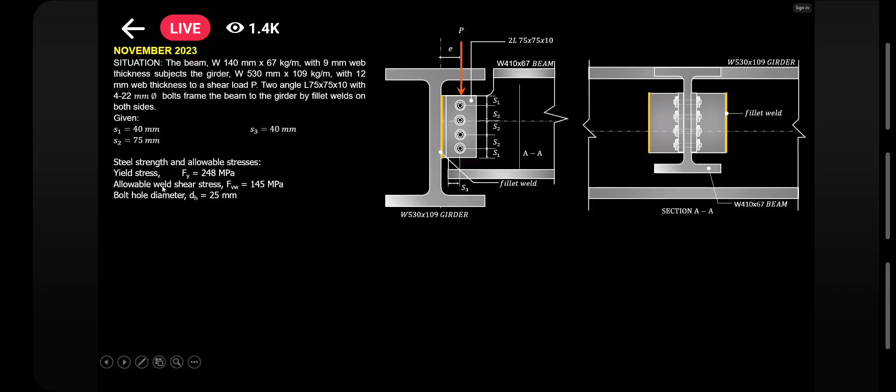So binigyan tayo ng allowable stresses ni Ma'am Proxy. So weld shear stress is equal to 145 megapascal. Okay, ganito. Ang question ni Ma'am Proxy during the time is number 1.

Given that P is equal to 280 kilonewton and E is equal to 0, determine the required weld thickness in mm. Alright, so dahil sinabi ni Ma'am Proxy na E is equal to 0, ibig sabihin nito, tanggalin ko muna ito. Ano ba ito?

Okay, dahil sinabi niya na E is equal to 0, it means na yung load natin is banda dito. Di ba? And notice that this force is already acting at the center ng ating weld group. So ano ba ibig sabihin nito? This only means that this is a concentrically loaded connection.

So basically, this force will be distributed equally sa buong length ng ating welds. So ano lang gagawin natin? When E is equal to 0, we will analyze this due to direct load only. This makes sense kasi wala namang may-induce na moment, di ba, when E is equal to 0.

So ano yung formula gagamitin? fv is equal to force over the total length. So kung saan yung P natin as given, this is 280,000 at yung length natin, paano ba yung length?

So nandito yung weld length guys ha. Pag i-project natin yung weld length, ito po yun. So that is your L. So to get the total length, yung isang length na ito, this is dalawang 2S, dalawang S1, tapos tatlong S2. So since kabilaan po ito, we need to multiply it by 2. Okay, so this is equal to 610 mm.

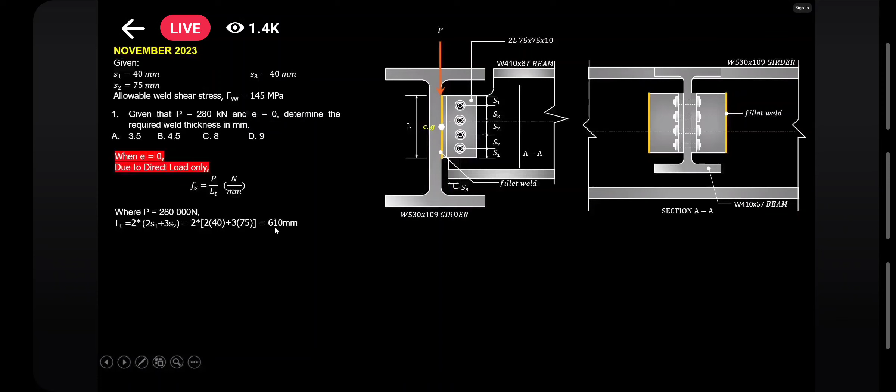So therefore, our force due to direct load, that is 459.02 Newton per mm. Ngayon, since nagdi-design tayo ng weld thickness, wag nating kalimutan yung pinaka-principle, di ba?

Actual stress should be less than or equal sa allowable stress. In layman's term, kumbaga, dapat mas malaki yung capacity natin kumpara sa stress na pwedeng idulot ng force na 280 kilonewton. So ano ba yung stress? Di ba baon natin yan, di ba? Force over area less than equal sa allowable stress.

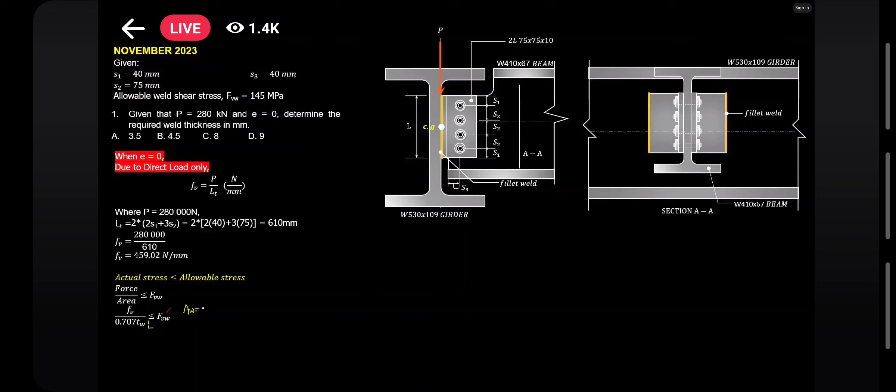So yung force natin, that is fv over 0.707 tw. Now dito ko i-emphasize lang guys ha, kasi yung iba, dito na mamali. Ang ginagawa, nilalagyan pa ng L dito. That is wrong, no? Sir, di ba yung area ng welds, this is 0.707 TW times L.

Well, technically speaking, you are correct. But this is not valid for this context, kasi itong fv na to, this is Newton per mm. So by unit analysis, this does not make sense.

So you have Newton per mm, i-divide mo sa TW, that is mm, di ba? Okay, yung length, that is also in mm. So what would be the resulting unit? This is equal na yun sa Newton per mm to the third. And this is not equal kanino? Kay megapascal, because megapascal is Newton per mm squared. Okay, I hope naintindihan niyo na.

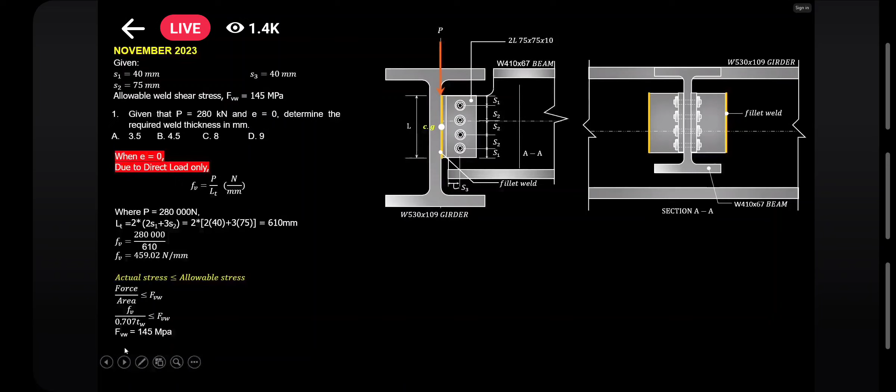So let's continue. Yung Fvw, substitute lang tayo dyan, and we get already this answer. Now, nung lumabas to sa board exam, unang tanong, nakangiti lang sila kasi yun, 4.48. Kuha na agad yung sagot natin, that is 4.5 mm, okay?

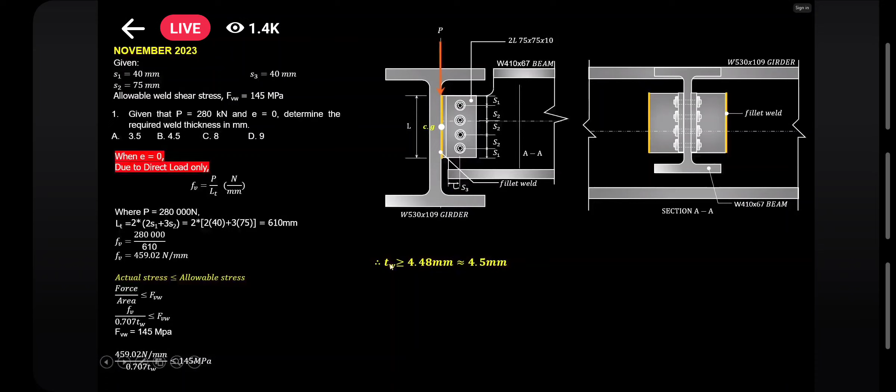Let's go to the second question. Yung pangalawa: given that P is 280 kilonewton and E is equal to 45 mm, determine the critical shear. Okay, because of the presence of the eccentricity, kailangan po nating i-account yung moment na pwedeng i-induce caused by this eccentricity, di ba? So therefore, itong critical shear na to, this is not only for the direct load only, no?

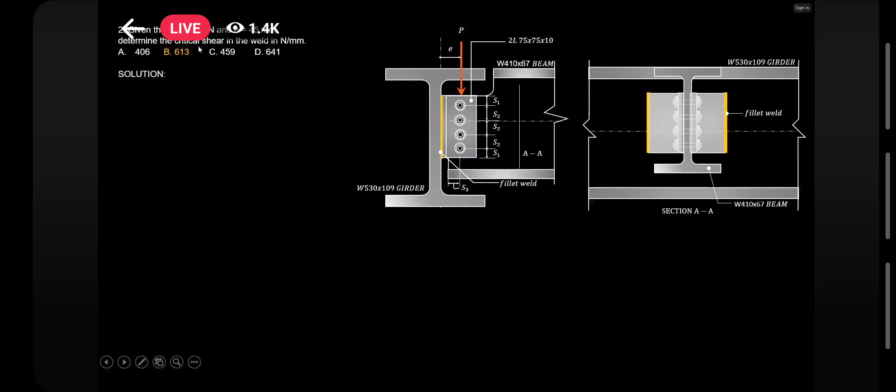This is plus the moment effect. So critical shear only means resultant. In getting the resultant, that is just fv squared plus ft squared.

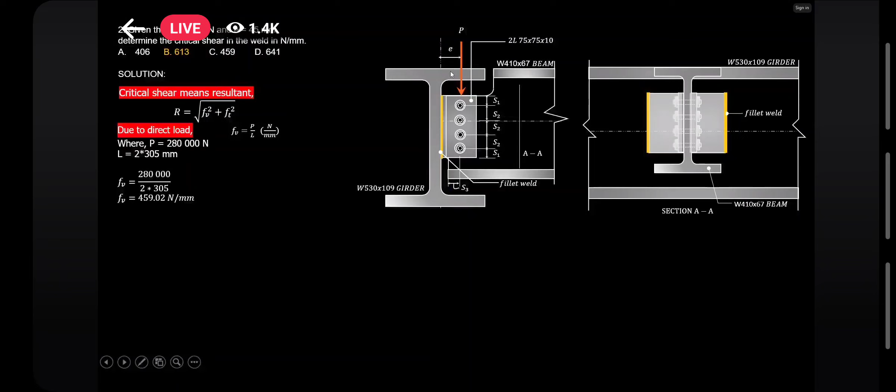So guys, let's just make a convention here. If you can generate moment about X or moment about Y, the effect is always bending. MZ, on the other hand, is twisting.

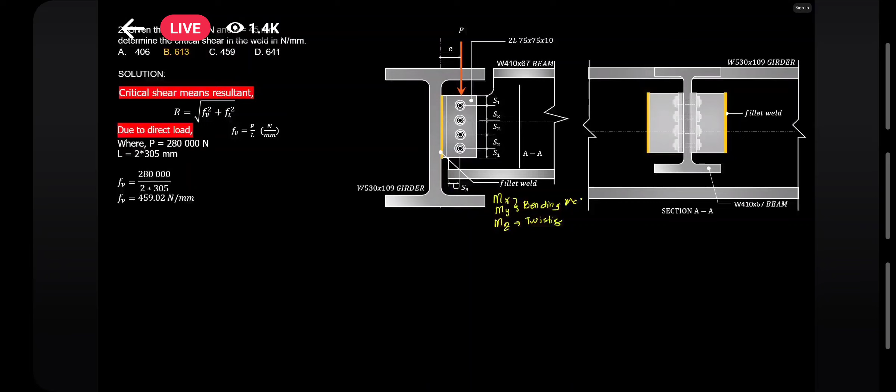For bending, this is MC over I. For twisting, this is TR over J.

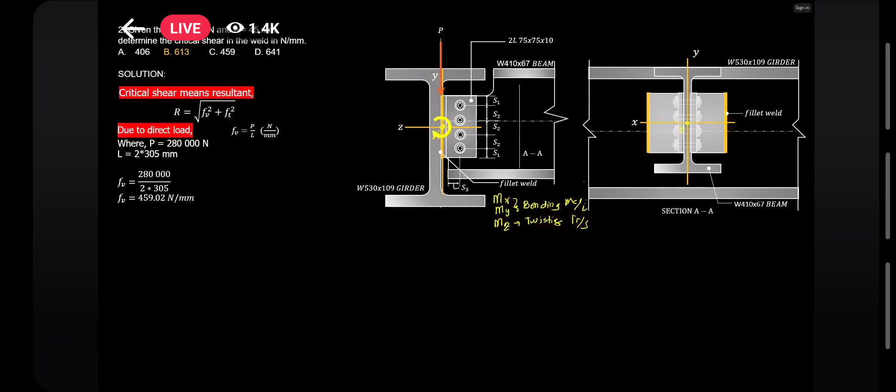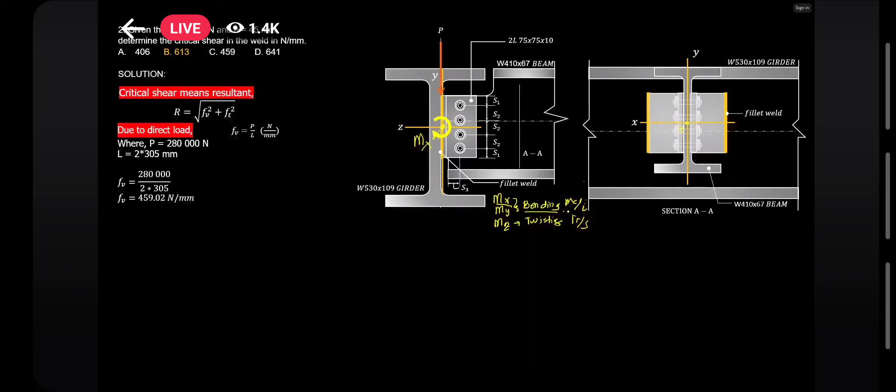This is moment about X, right? If it's moment about X, therefore the effect is bending, and therefore the formula is MC over I. Okay, I hope that's clear.

Let me clear this up. Therefore, due to bending, FT equals MC over I. What is our moment? That is just P times E, right? 280,000 times 45, and that is 12.6 times 10 raised to the power of 6 Newton-mm.

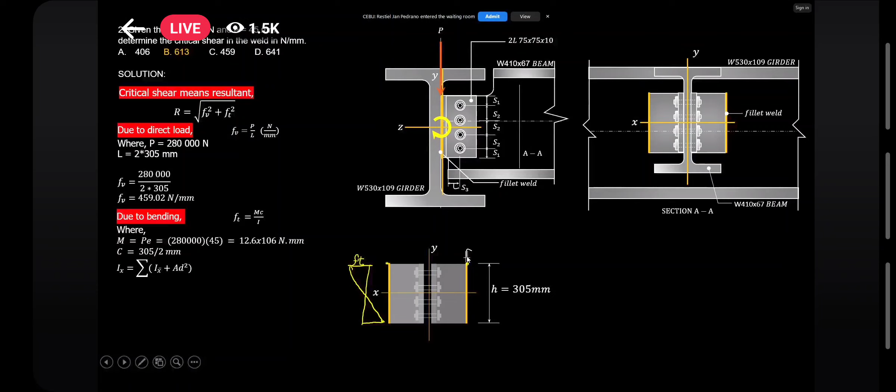That is, summation of the centroidal moment of inertia about X plus A d squared. Because this is a line, right? If it's a line, it means our width is very thin, but we can consider it as 1 or unity.

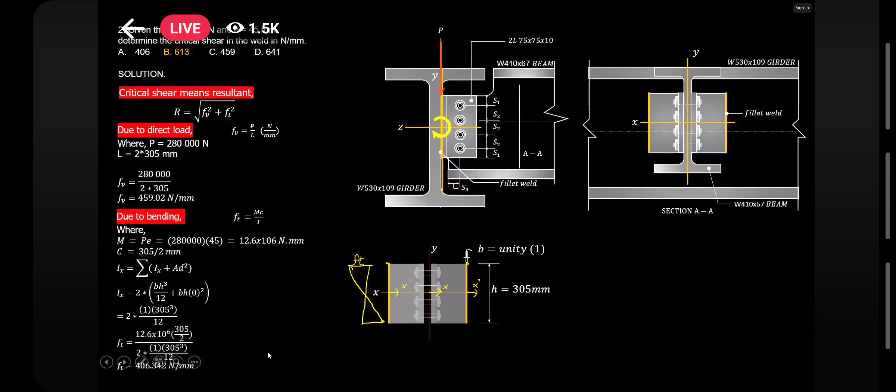So let's just substitute. We get the FT. So the FT is equal to 406.342 Newton per mm.

So in order to get the resultant, we compute that. That is 613.04 Newton per mm. Okay, so that's how simple it is.

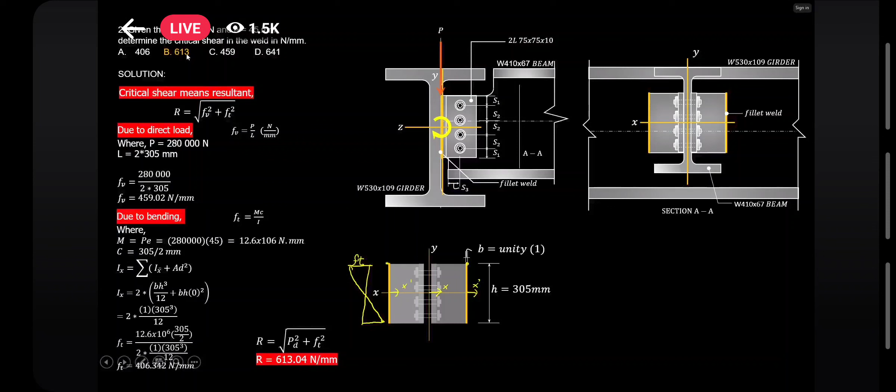What if, sir, it's lying down? Okay, how do we get the moment of inertia? Just establish an axis. Then, this is the depth. This is our B. So what happens, this width, okay, this becomes the height, so to speak. So you treat that as unity too.

1. So it's still the same, the moment of inertia is equal to the summation of the centroidal moment of inertia plus AD squared. Okay, so basically that is 2 since it's on both sides. B times our height, that becomes 1, over 12, plus BH times D over 2 raised to 2.

That C there, guys, that D there, this is it, because here is our local X. And here is our global X. So meaning, this axis doesn't coincide with this axis. So we need to transfer, right? So this dimension is D over 2. That's why it's like this, okay.

So notice that B times 1 raised to 3 over 12 is very small, guys, because what you're cubing is 1, right? So we take this as negligible. So if it's negligible, guys, it won't affect our moment of inertia. So if that's negligible, that's just 0 for us. Okay, so hence, Ix is equal to 2 times BH times D over 2 raised to 2. So this is our Ix. I hope you followed that, guys.

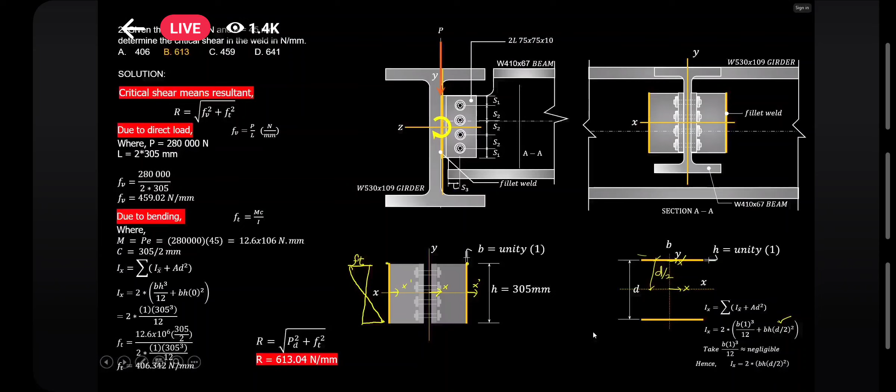If the bolt capacity in double shear is VU 173.2 kilonewton and E is equal to 45 mm, everything is confusing because it only says bolt capacity. Can we take this individually or is it by group? When this came out in the board exam, guys, this is taken as the group capacity, the bolt group capacity, because 173.2 is too large if it were per bolt. So this is taken as group.

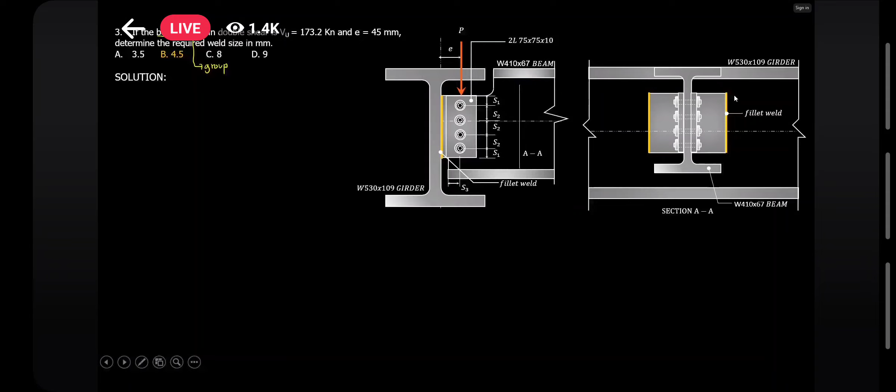By the way, in your pre-boards, I guess what's written there is each bolt capacity, right? So that's clearer than the board exam. So for each bolt capacity, you need to multiply it by 4. So that's it. Okay, but this is what came out in the board exam based on my source.

So due to direct load, fv is equal to P over L. Where, okay, our length stays the same, it doesn't change. Just our fv, that becomes 283.93, because that went down, becoming 173,200 Newton.

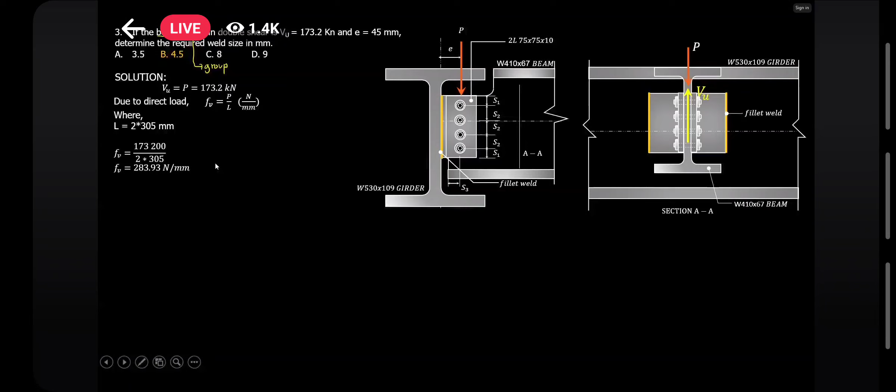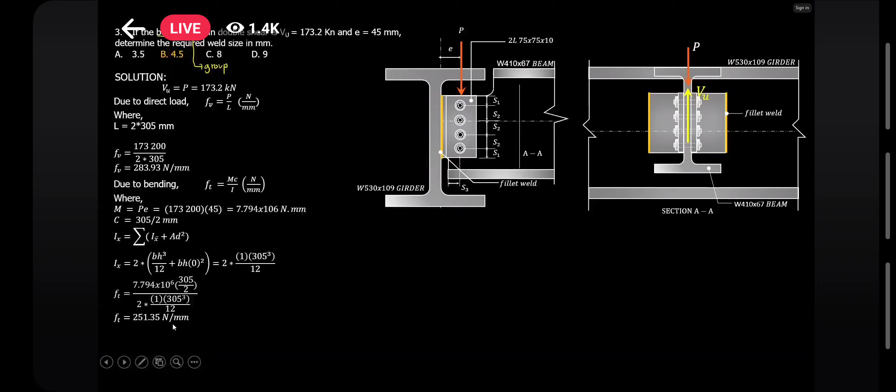So due to bending, bending is still the effect. So it's still the same, guys, right? Just repeat for performance, it's still the same. So you get the FT equals 251.35. So there you go, we got the resultant.

Since weld thickness is what's being asked, we just need this principle: actual stress should be less than or equal to the actual allowable stress. What's actual stress? Force over area. Our force, don't forget this is in terms of Newton per mm. We divide by 0.707 TW, less than or equal to Fvw. So don't put L here anymore, guys, because we're already per mm.

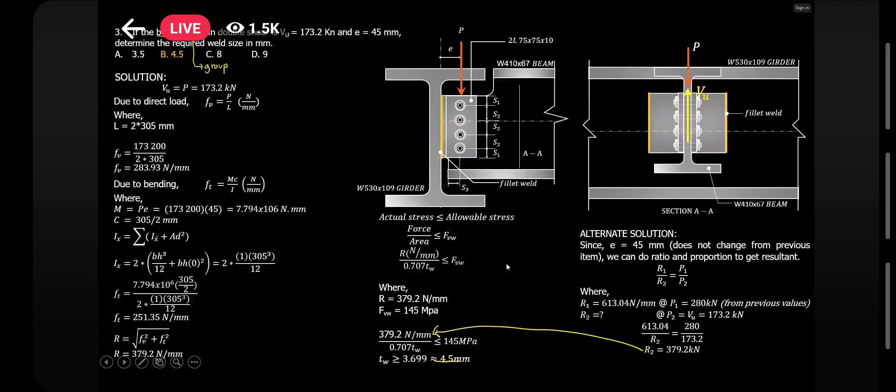Pero guys, this is only valid if they have the same eccentricity. Kasi pag hindi na, kailangan mo gawin yun. Okay, so I hope simple lang. This is our first item, our first situation. Can we move on to the next? Wala tayong magagawa, set tayo.

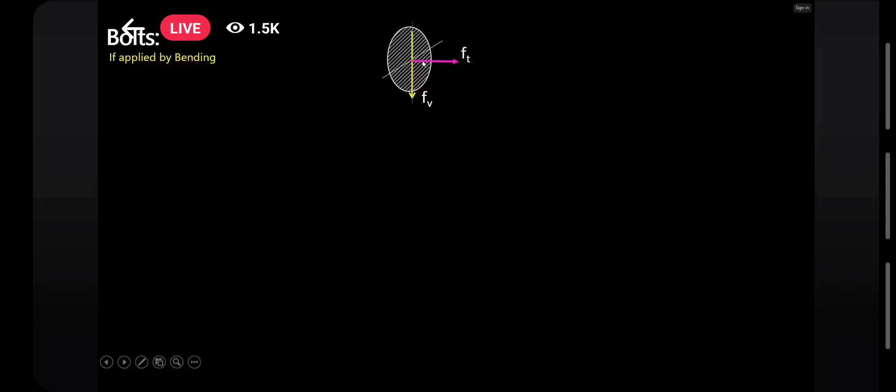Next, sige. Ginawan ko to ng summary. Para sa bolts, if applied by bending, yan no? Bending naman na, so pag ganyan, ito yung bending, ito yung ating shear. So, tensile stress, force due to bending only. Yung shear stress due to direct load only.

Note, hindi pwede nating i-combine at saka kunin natin yung resultant to solve for the stress because every force will have different effects with respect to its area. So we need to check the individual limit state.

Remember, itong ating tensile to, kasi bakit? Yung area na to perpendicular sa force na to, di ba? Dito namang fv, this is shearing. So hindi po natin kailangan na kunin yung resultant.

Mag-iiba po yun. Ano yung kunin mo dyan? Huwag mo sabihin, kunin mo yung resultant dito. Paano ba yan? Hindi na yan normal at the same time, hindi na yan parallel. Anong tawag doon? Ewan ko.

Itong FT, klaro naman na perpendicular yan. Itong ating plane with respect sa ating fv, that is parallel. So you need to check this individually. Huwag mong i-resultant.

Pero ganito guys, if ever pinapa-consider talaga kasi sa totoong design, if you have both forces na nag-act dito sa bolt, use code given for the reduced capacity of tension due to the presence of shear. Mababawasan kasi yung tension capacity if meron kang shear force. Okay, so nababawasan yan, gagamitin mo yung code na to.

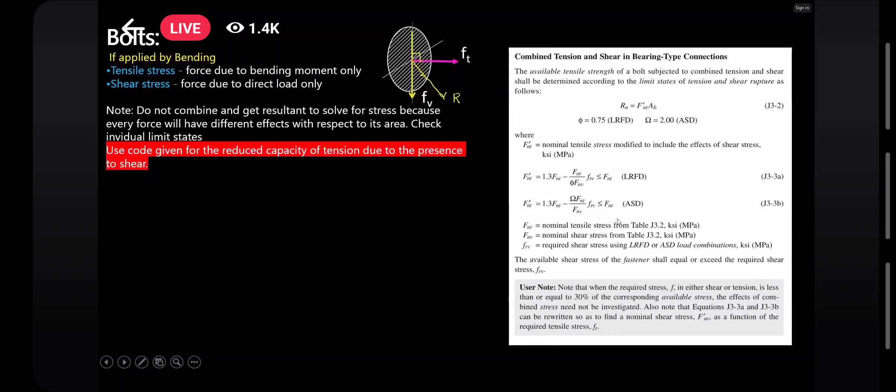Nakita mo ba to? Gaano to kahaba? Oh, di ba? Oh, hindi yan lalabas. Kalma lang, di ba? Huwag mo nang, ano yan. Anong gusto nating patunayan, di ba?

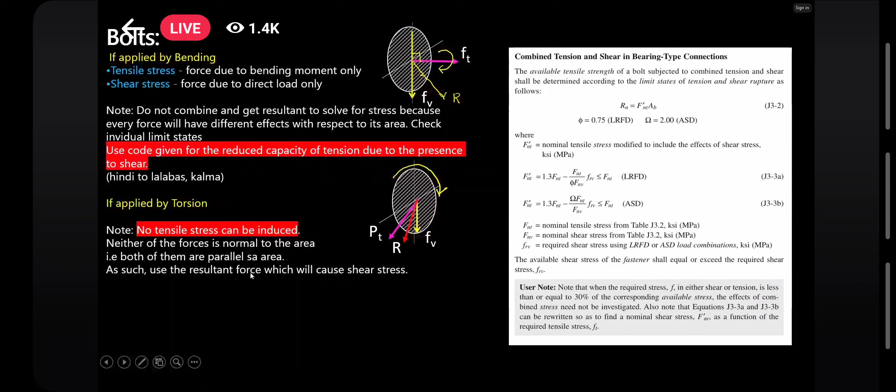Kung shearing effect ng torsion at due to direct shear or direct load, there is no tensile stress can be induced. Neither of the forces is normal to the area, right? So walang tensile, makes sense. Both of them are parallel sa area. So as such, you can use the resultant force which will cause the shearing stress.

Yung shear stress, kunin mo lang, no? Yung resultant due to the combined direct load and torsion. I hope malinaw po yun, kasi namamali yung iba dito.

Okay, for welds naman, it doesn't matter. Kaya lang, ang tandaan nyo, wala pong tension stress na maidudulot yung force doon sa weld. Shear stress lang. Ang gawin mo, kunin mo lang yung resultant always. Again, pag welds, kunin mo lang yung resultant always.

Hindi mo ba napapansin guys? Ang palaging binibigay sa welds is the allowable shearing stress sa weld. Ito yung binibigay palagi sa weld eh. Meaning to say, ang palaging mai-induce ng mga forces is shear stress only. I hope klaro tayo yun na, so that's always shearing lang.

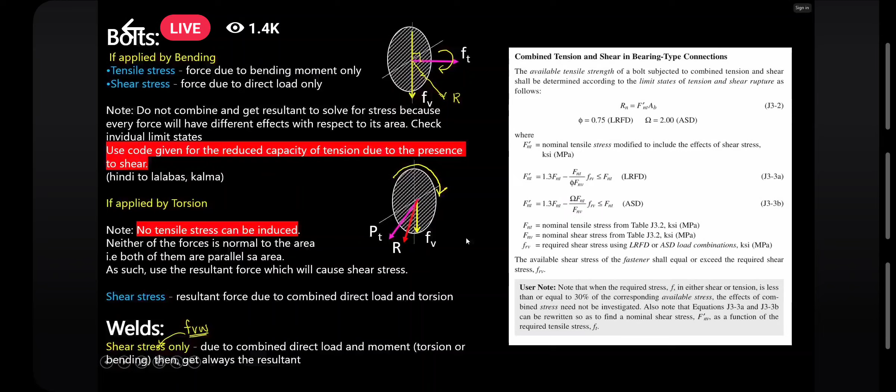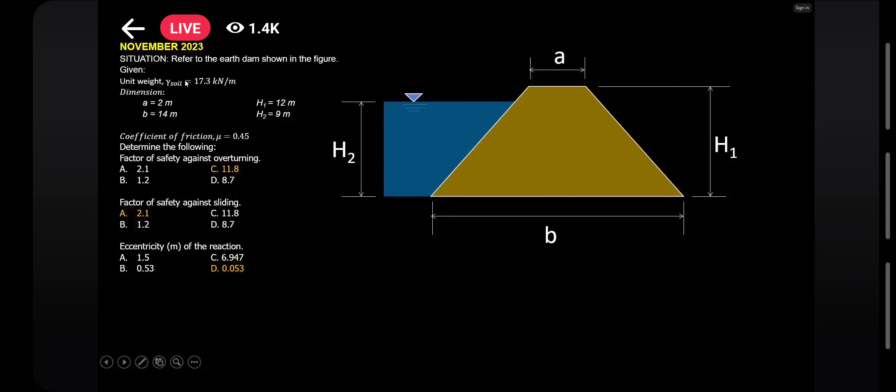Okay, so this is also the latest board exam, November 2023. Refer to the earth dam shown in the figure. You have unit weight of soil, 17.3 kilonewton per meter cubed. When this came out in the board exam, there was one set where the writing was so small it seemed like it wasn't considered. The unit weight used here was 23.4.

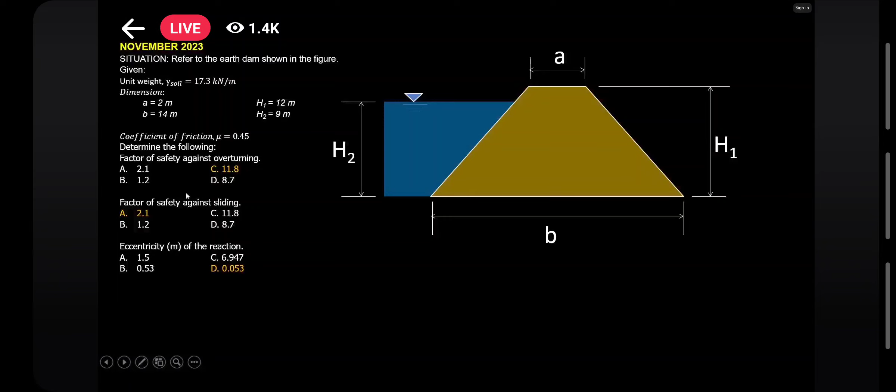Okay, so the dimensions are given too: 2 meters, 14 meters, 12 for H1, and 9. The coefficient of friction is also given. Determine the following: factor of safety against overturning. Let's tackle this first. I've established the dimensions here so we won't get confused. So, solution: solve for the weights and hydrostatic forces first.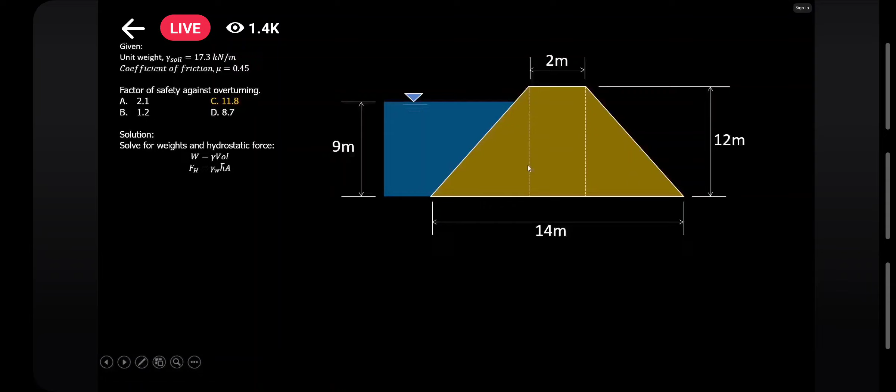The weight is just gamma of the material times volume. The horizontal force is gamma of water times h-bar times area. So we can divide this into 3 sections. This is our weight 1, this could be our weight 2, and this is weight 3.

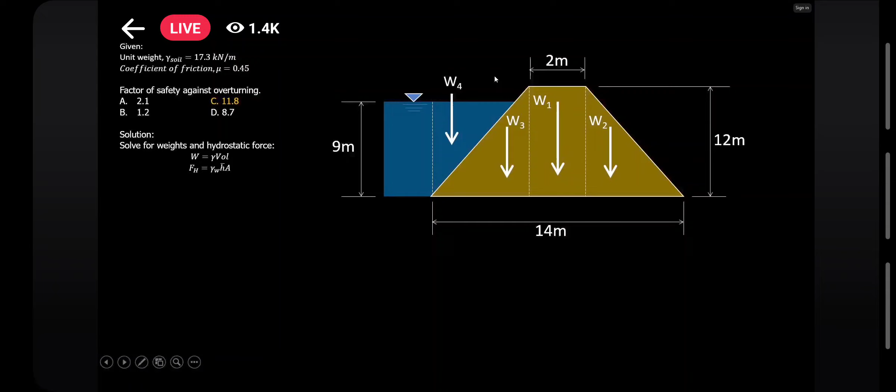Using 1 meter strip analysis, weight 1 is gamma soil times volume 1. So 17.3 times this 2 base times this height, 2 times 12, and we get this value. You can store that as A.

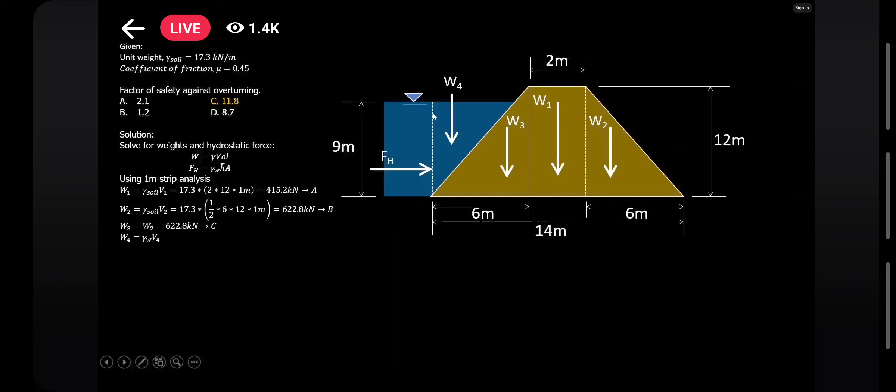So what's the volume of that? It's 1/2 times Z times 9 times 1 meter strip. Okay, by ratio and proportion, since they have the same slope — don't use ratio and proportion if the slopes aren't the same, I've told you that — Z over 9 equals base over height, so Z over 9 equals 6 over 12. We get Z equals 4.5 meters.

Okay, so now we have weight 4. You can store that to D. And now we also get FH. So FH is equal to this.

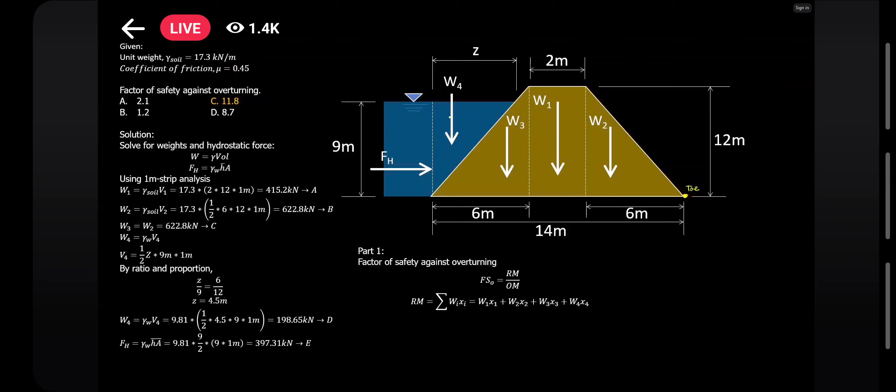So let's answer: factor of safety against overturning. Fs equals Rm over OM. What is Rm? The resisting moment. Where do we take the moment? Right here, at the toe. So that's the toe, and then we compute the moment there, but we need the x distances.

Here, this is x1, the x distance from weight 1 with respect to our toe. So that's half of 2 plus 6.

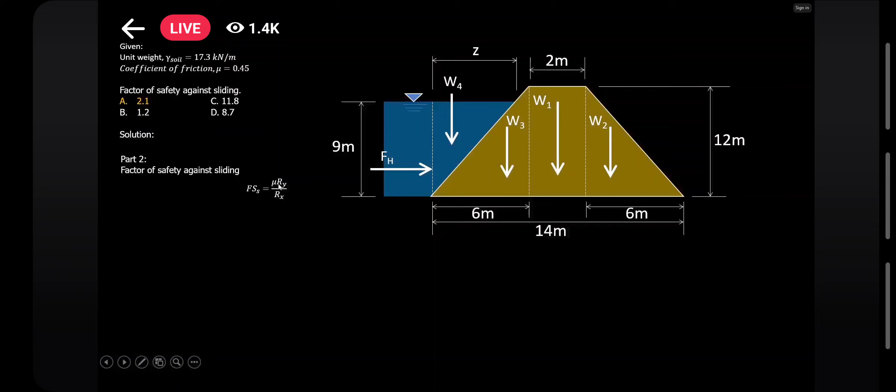To get the Ry, summation forces vertical ka lang. W1 plus W2 plus W3 plus W4, and you get this.

1859.45 kilonewton, so yung Rx naman, summation lang tayo dyan, so that is 397.305. So kuha na natin to, and this is 2.11.

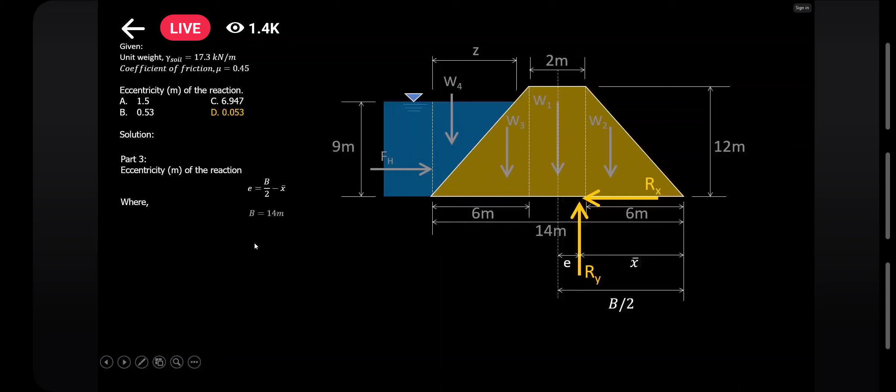Yung B natin is 14, and yung X bar natin is RM minus OM over RY. From previous solution, nakuha na natin yun, di ba? So diretso natin, this is X bar, that is 6.947. So kuha na natin yung E, that is...

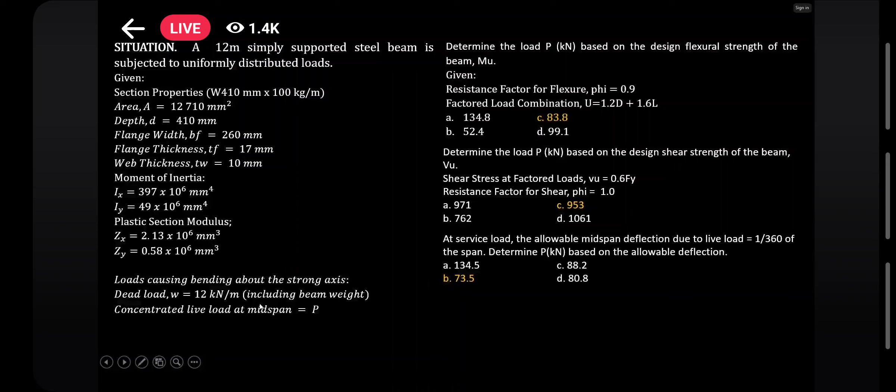Let's read this: a 12-meter simply supported steel beam is subjected to uniformly distributed loads. Given the properties, loads causing bending about the strong axis, dead load is this including the beam weight, and concentrated live load at midspan. So, number 1.

Determine the load P based on the design flexural strength of the beam, Mu. Given yung phi, that is 0.9. Factored load combination, binigay din.

Okay, so itong problem na to, this is under plastic analysis. Plastic analysis talaga to. So we need to solve this using collapse mechanism.

So paano ba yung idea nun? Recall kayo, alam naman natin na daan natin ito. So recall ko lang kayo. Halimbawa ito yung beam, sinubject natin yan ng load. So meron tayong 1.2 dito because kailangan guys naka-ultimate.

Because it's the ultimate load that can cause collapse at hindi po yung service load. So kailangan po maglagay ka ng factor.

Okay, pag ganito po yung loading natin, tapos simply supported, ang plastic hinge na mabubuo is obviously nasa gitna yan. Pero kung meron kang concentrated load, which happens to be nasa gitna din, edi nasa gitna talaga yung plastic hinge na mabubuo natin.

Okay, so what would be the collapse mechanism? So ito po yung mangyayari dyan. So itong nandito banda, ito yung point na yon kung saan nangyari yung plastic hinge. Therefore, madidevelop dyan yung plastic moment.

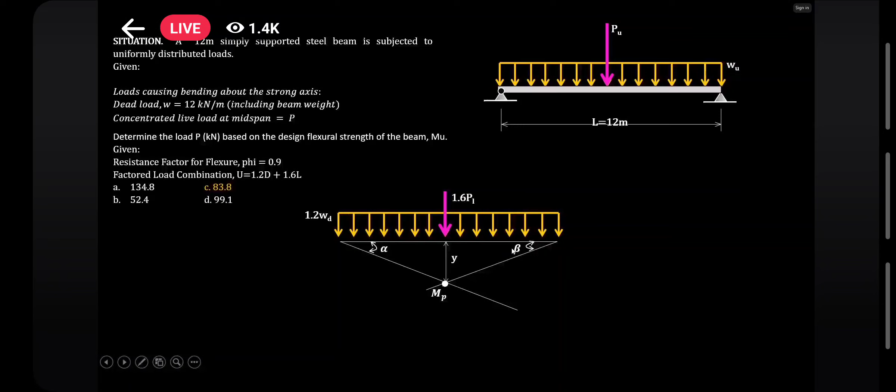So itong Y na to, this is your linear displacement. Ito nandito, this is your angular displacement. This one is beta. Now, do you agree guys na if this is alpha, therefore yung angle na nandito is alpha plus beta. Okay, so this is the total length.

Paano ba pag-solve ng collapse mechanism? Tandaan nyo to, guys, ha. If we are solving collapse mechanism, we just use the principle of virtual work method, kung saan ini-equate lang po natin yung work done by the external load sa work done by the internal loads.

But remember, we have two types of load here: uniform at saka concentrated load.

If you have uniform load, para siyang ano yung idea sa influence line diagram. Minomultiply mo siya sa displaced shape ng ating beam, di ba? So ganun lang po dito. Since we have uniform load, imomultiply mo siya sa area na nabuo. O anong area to? So triangle yan, di ba? So multiply mo yan dito sa uniform load.

Yung concentrated load naman, imomultiply mo siya sa kanyang respective ordinate, kung saan siya nakalocate. Since this is located at the midspan, ito po yung Y na kailangan nating i-multiply. Okay, ganun lang po sa work done by the external load.

Pero pagdating sa work done by the internal load, so ano ba yung load internally? Di ba yung moment? So saan natin siya i-multiply so that we can produce work? I-multiply mo siya sa angular displacement. And in this case, yung kanyang angular displacement here is alpha plus beta.

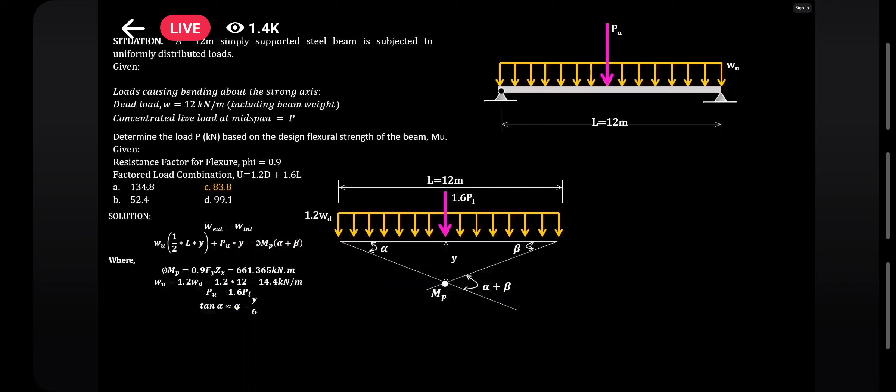O ito, gusto ko lang emphasize to itong tangent alpha. Kailangan natin express yung mga angular displacements in terms of the linear displacement y. So, using trigonometry, that is tangent alpha equals opposite over adjacent, so y over 6, kasi kalahati ng 12 is 6. Kaya lang, itong mga angular displacement na to, itong mga angles na to, these are very, very small values, maliliit.

Nagsosolve ba kayo? Na-notice nyo guys na sobrang liit yung during your theory of structures? Since sobrang liit nito, okay, we can equate this as the alpha itself, and that is equal to y over 6. Ganun din po sa ating beta, y over 6 yan.

So, by substitution, kukuha mo na po yung ating PL, that is 83.8. And that's exactly sa C. So, yun.

Magbigay lang ako ng example kung saan ang plastic hinge na pwede ma-develop is 1. O paano ba yun? I think ito yung mas ginagawa ng iba kaysa yung plastic analysis, yung collapse mechanism. So, MU less than equals sa ultimate capacity.

So, sino man yung MD? MD is the moment caused by the dead load. So, ano ba yung maximum moment na pwedeng i-induce ng uniform dead load na to? WL squared over 8. Tama? Pag live load naman, concentrated lang naman to, ano ba yung moment? Hindi PL over 4?

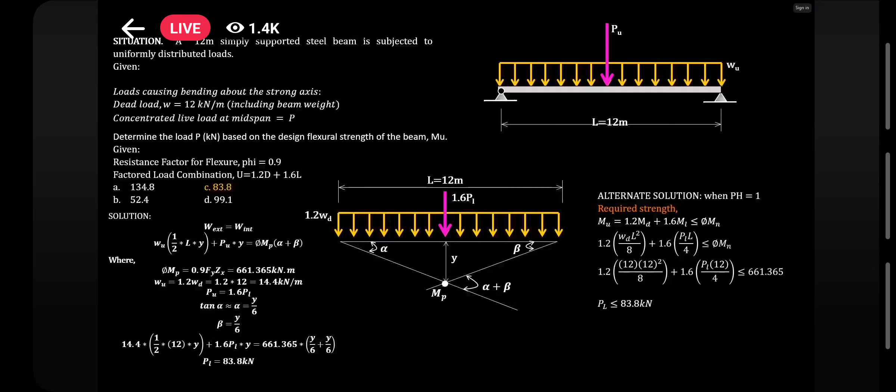Yung last November 2018, I guess November yun eh. Ewan ko lang guys, I'm not sure, basta 2018 ata yun. Yung lumabas sa kanila is hindi simple supported beam, prop beam siya. Pag prop beam, indeterminate yan, di ba? Eh di hindi na po iisa yung plastic hinge na mabubuo.

So, ito yung prop beam. Saan ba yung plastic hinge na mabubuo dito? Obviously, nandito ha, okay, ito. Change ko lang to. Ito, plastic hinge to nandito. Okay, ito naman, we have plastic hinge na nandito. Ito naman, ito yung tunay mong kaibigan, di ba? Oo, ito yung dalawang kaibigan. So, ito naman, plastic hinge na nandito. Okay, so obviously, dyan mangyayari yung plastic moment.

So, yung tanong, saan yung location nito? Yung location nito guys, alam ko na i-discuss natin to. So this is 0.414L. Sir, kailangan pa ba i-memorize yan? Yes, i-memorize mo yan guys ha, that's 0.414L. Okay, pag ganito lang guys, pag uniform loading.

ito yung basa prop beam.

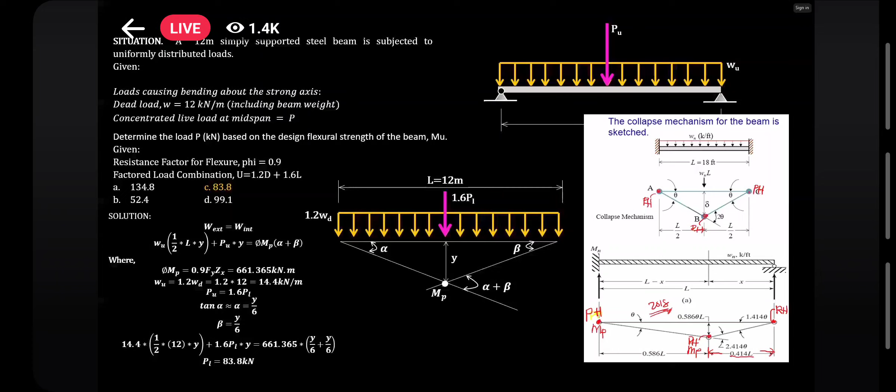Determine the P based on the design shear strength of the beam VU. Shear stress at factor loads, VU equals phi times 0.6 Fy, and the resistance factor is 1.0. So, required strength: VU must be less than or equal to our ultimate capacity.

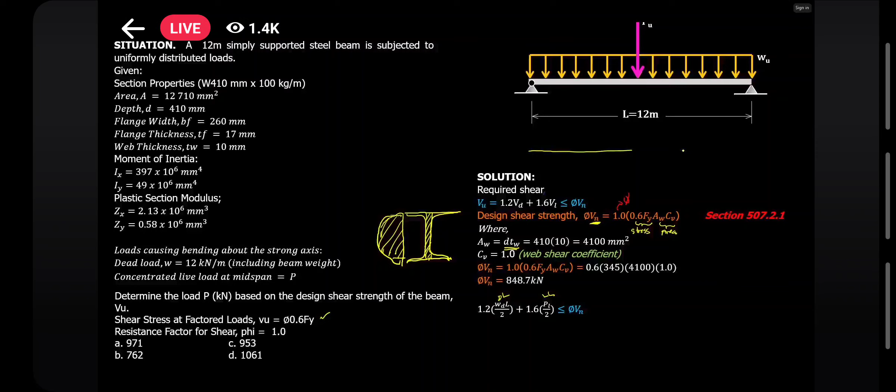This is the maximum shear that can be induced by the uniform load. If we draw the shear diagram, it looks like this, then like this. So this shear here is your WU times L over 2, plus PU over 2, where WU is 1.2 times the dead uniform load, and this is 1.6 times the live load.

I hope you were able to follow, guys. So, to be sure about the maximum shear, just draw the shear diagram. So by substitution, we get 952.875.

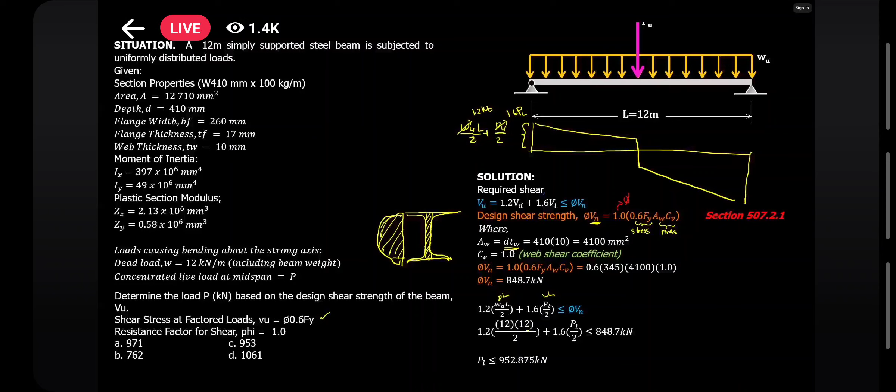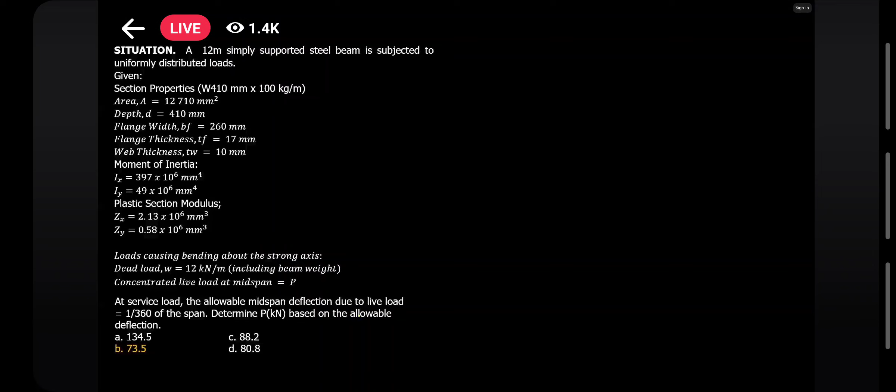So for the last question, we have service load. The allowable mid-span deflection due to the live load is 1 over 360 of the span. Determine the P based on the allowable deflection. So this is our configuration. What is our allowable deflection? That is 12,000 mm over 360, which equals 33.33 mm.

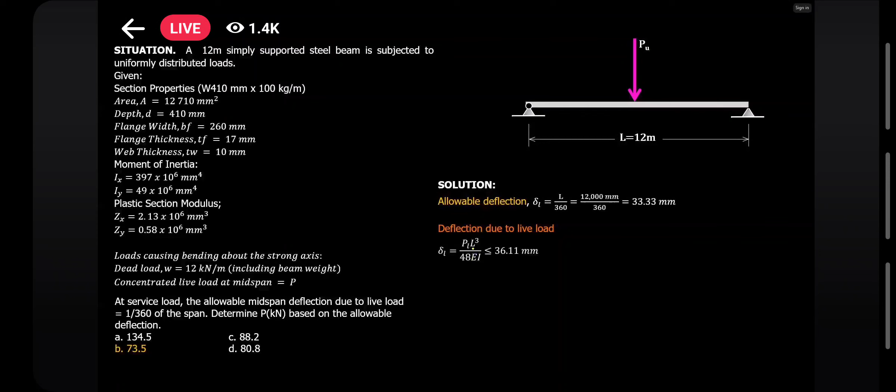So our deflection due to the live load, this is equal to PL cubed over 48EI. Guys, let's not forget this. What about if it's uniform load? That's 5 over 384, this is the constant, WL to the fourth over EI. That's for uniform load, guys, but for concentrated load at midspan, it's PL cubed over 48EI.

Okay, so let's just substitute. Guys, live load only, please. And remember, it says service load, so for service load, don't use the ultimate factored values. So therefore, this equals 73,500 Newtons. So that's it, this is the final answer.

So just remember, guys, what if it didn't say due to the live load? Then you might mistakenly include PD plus PL. That would be wrong, guys, because we're talking about serviceability, so only the live load should be considered. I hope that's clear.

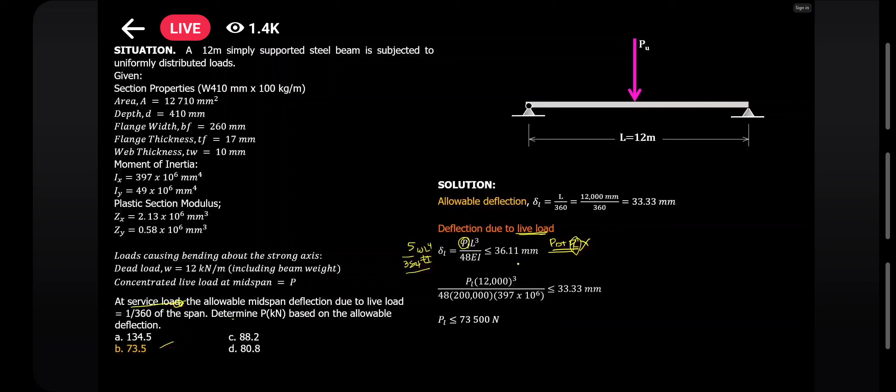Let's proceed to the last— oh wait, this isn't the last one yet. So this is really the last one now. Sheet pile: the sheet pile shown is provided with tension rods spaced 3 meters apart. The wooden stringer has D equals 350 mm and can be considered simply supported at each connection to the tension rod. Allowable bending and shearing stresses of the stringer are 16.2 megapascal and 1.84 megapascal respectively. So here is our figure.

So this is our D, and this is our B. Like this. Okay, what is the question here? What is the design moment of the stringer in kilonewton meters? Don't worry about this other moment.

Let us establish the forces. Since this is a tension rod, of course there's tension, right? Then this F1 is caused by the lateral force of the earth or soil, while F2 is your hydrostatic force. So F1 equals one half Ka gamma of soil times H squared, right? So that equals what?

89.91 kilonewton per meter. For F2 naman, that is 1/2 gamma ng water times H squared. So yung F2 natin, that is 35.76 kilonewton per meter.

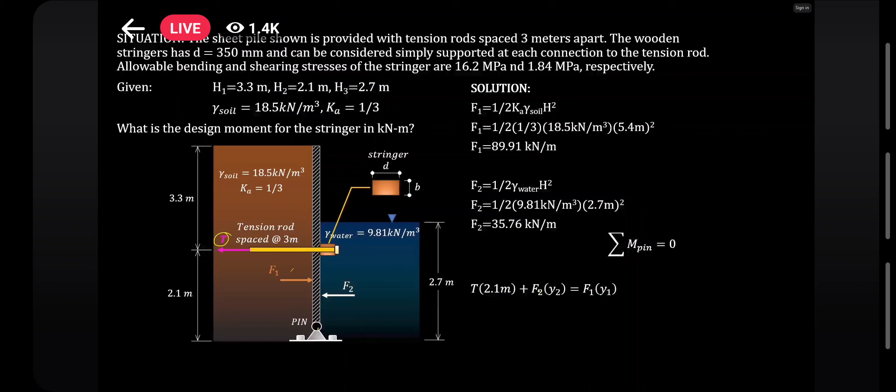So by taking summation moment at the pin, ano bang makukuha natin dito? It's the tension, di ba? So T times 2.1 plus F2. So asan ba yung F2Y, ang Y2 tsaka Y1? So ito yung FY1 natin. That is the distance from the force 1 with respect sa pin. Ito naman yung ating F2 with respect sa ating pin, that is Y2 naman. So substitute mo lang siya.

Okay, so therefore we have this T equals 61.741 kilonewton per meter. Now this is per meter pa lamang, guys. So since we are spaced 3 meters apart, so you multiply mo to ng 3 meters and you get 185.22 kilonewton. Now ano nang gagawin natin?

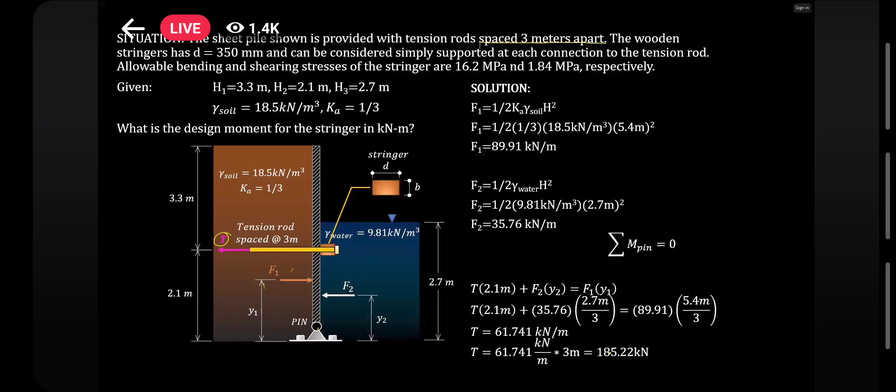Okay, so ito yung dapat nating maunang makuha, guys. O bakit sir, o ganito.

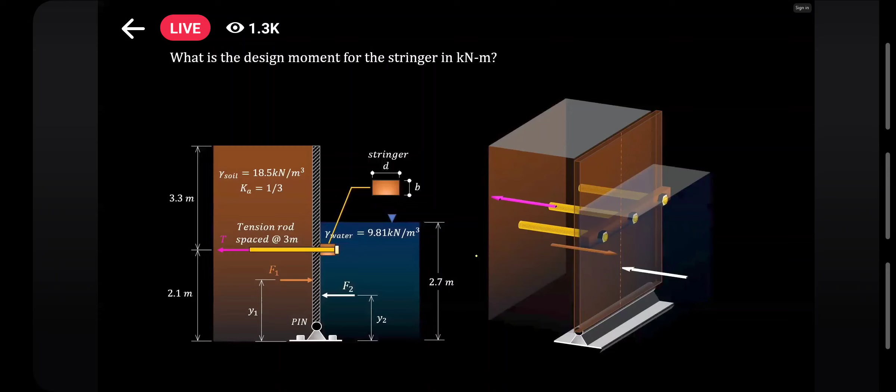So ito kasi yung, para mas ma-imagine nyo, ito yung forma ng ating stringer. So bale ito yung ating wooden stringer. Ito nakikita nyo, ito yung wooden stringer. Ito naman yung mga tension rod na nandito. So itong brown, that is the lateral force. Saka yung white, saka yung pink, that is your tension rod. Okay, I hope na-imagine nyo.

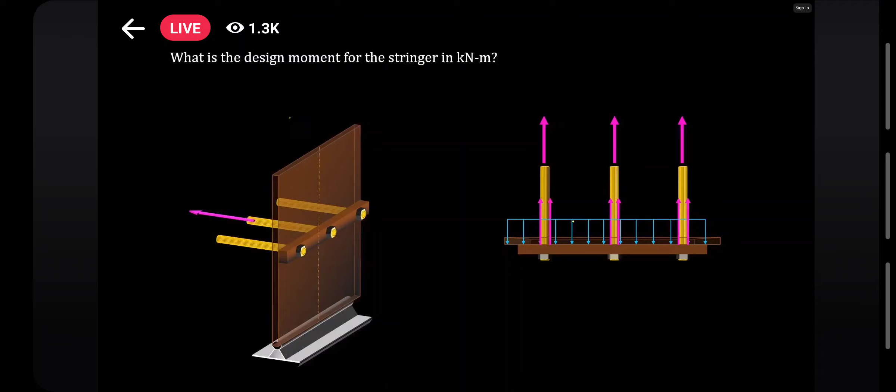So yun, so what is the design moment? Okay, ito gawin. Di ba kung titingin tayo sa top view, ito yung makikita natin. I hope na-imagine nyo guys. Pag titingin ka sa top view, ito yung makikita natin. So yun, okay, nakita nyo ba? Pinaghirapan ko yun.

Di ba, yan po yung ating magiging free body diagram. So ito yung T, ito yung R, ito yung W natin. So ito yung 3 meters na sinasabi niyang 3 meters apart. Okay, so what would be the analysis here?

So from the beam diagram shown, since ang moment na pwede nating ma-induce dito, since this is uniform na, that is WS squared over 8. So di ba guys, may given tayo na T? I mean na-solve na natin yung T, di ba? 185.223. But okay, pwede ba nating isipin, guys, na itong T na to, is the resultant of these R's.

Di ba, so yung T natin is 2R, di ba? Ito yun, kabilaan, resultant. So kung kunin natin yung R sa kabilaan, edi 92.612 kilonewton tayo.

Okay, solving for W, okay, parang nauna yung moment na. Anyway guys, malalaman natin kung bakit ito yun, WS squared over 8. Kasi, okay, parang ititreat kasi natin itong span na to as simple span. O tingnan natin ha, para siyang ito. I-redraw ko siya maayos.

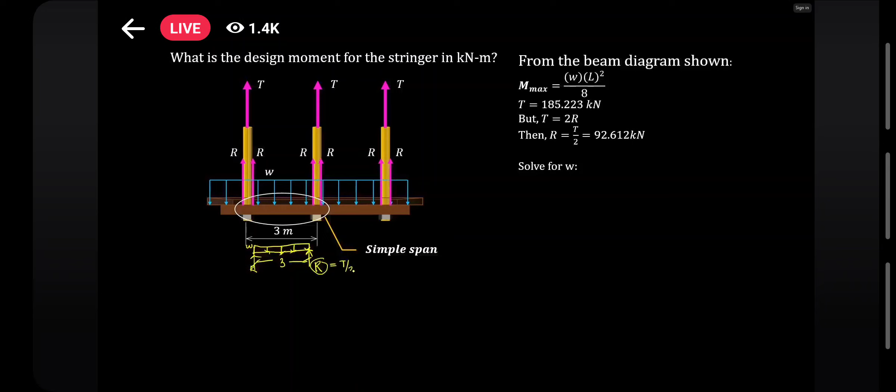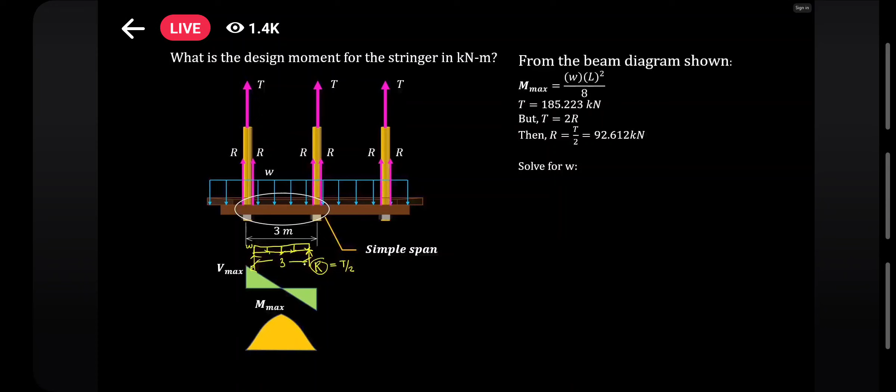So itong R, saan natin nakuha? This is T over 2. Okay, so yung shear diagram nito is basically ganito, di ba? Tapos yung moment diagram is paganyan. Okay, kasi simple span lang naman to eh. So yun, oh ito pala.

At least na-imagine nyo, so kung bakit WS squared over 8 yan. Well, we treat this as simple span eh. So W, okay, that is, hahanapin natin. So di ba yung R na-solve na natin kanina? Na-solve natin to guys, gamit yung T. Di ba, T over 2 lang to, which happens to be 92.612.

Equals W times L over 2. So the W is 61.74. Kumbaga guys, di ba, parang sanay tayo na mag-solve ng reaction, di ba? Ito naman, given yung reaction, isi-solve natin yung W. Do you get my point? So parang pabaliktad siya, okay?

So yung W natin na nakuha is 61.74 kilonewton per meter. And the maximum moment, therefore, is WS squared over 8. So substitute natin yan, the answer is 69.458 kilonewton meter. Okay, so ganun lang.

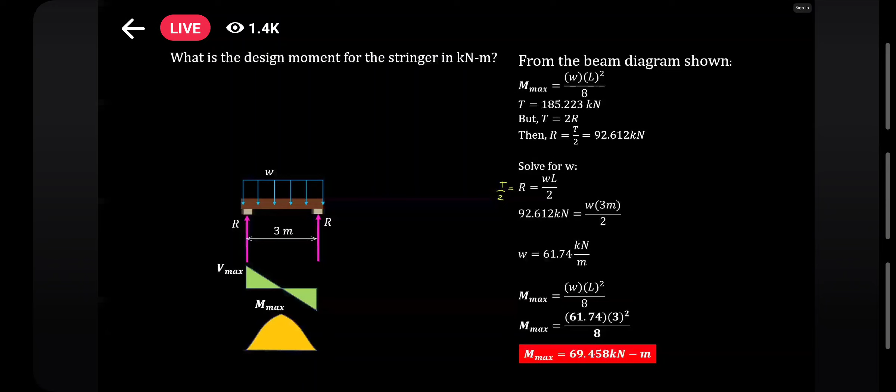Okay, what if, ito naman yung tanong, what is the value of the stringer width based on bending? Okay, so since nagdi-design tayo, wag nating kalimutan to, di ba? Actual stress should be less than allowable stress. Dapat mas malaki yung capacity natin kaysa sa stress na pwedeng idulot ng load natin. So yung allowable na binigay is 16.2 megapascal. So therefore, ito na po yun na. So ang actual stress, that is bending, so MC over I. So moment, di ba, parang nasolve na natin yun kanina eh.

Let's solve this, L is 3, we get the maximum moment. Substitute this moment here. Substitute, this is it. This is our D. Then our B, here it is. B, 350 cubed over 12. So this should be less than or equal to 16.2, the allowable. So you have the answer of 210 mm.

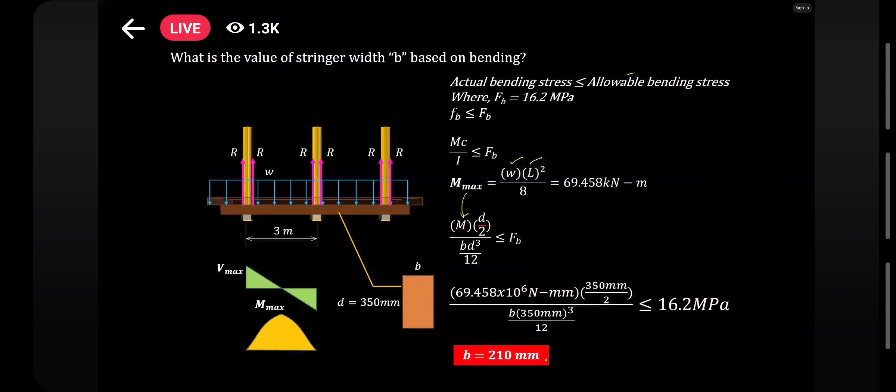Next. What is the value of the stringer width B based on the shear?

Based on the shear, same as before, actual shear stress should be less than allowable shear stress. When you're designing, guys, this is really the main principle. Our allowable is 1.84.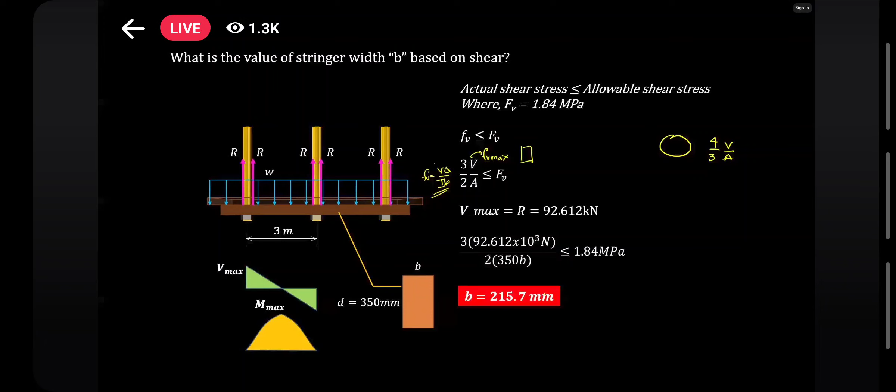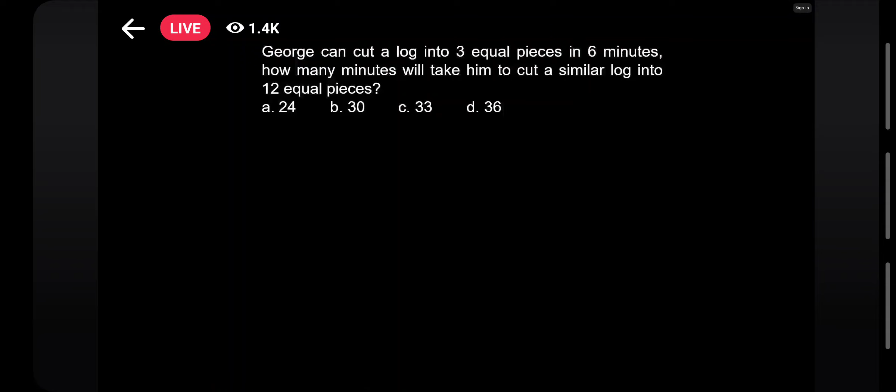Bonus question. George can cut a log into 3 equal pieces in 6 minutes. How many minutes will it take him to cut a similar log into 12 equal pieces?

Very easy, right? What do we just do? 6 minutes for 3 pieces equals T over 12 pieces. Therefore, T is equal to 24 minutes. This is wrong, this is incorrect.

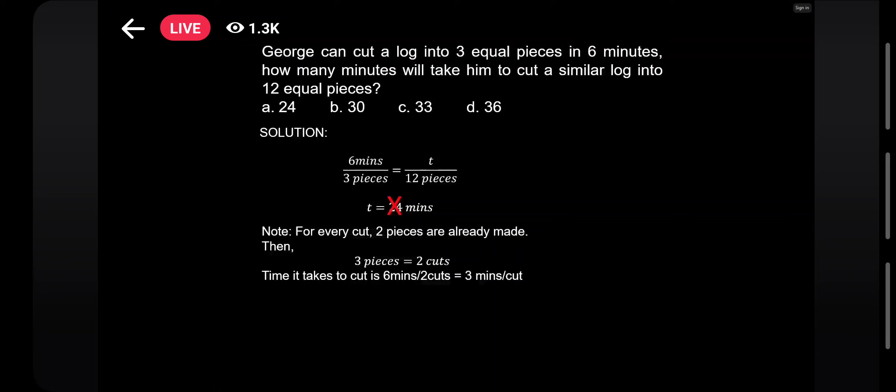Why, sir? Now remember guys, for every cut, how many pieces do we make? Isn't it two right away? So if it's two per cut, therefore for 3 pieces, how many cuts are needed? Two cuts, right? So how many minutes per cut? It takes 3 minutes per cut.

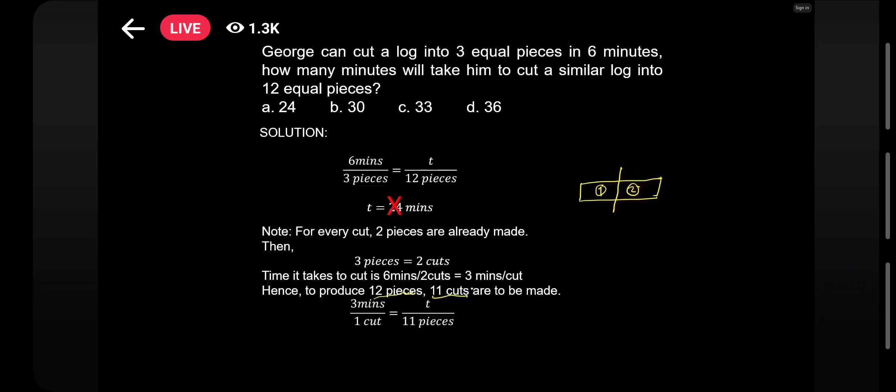11 cuts. So therefore, per cut, 3 minutes over 1 cut equals T over 11 pieces. Therefore, T is 33 minutes. So a lot of people got this wrong.